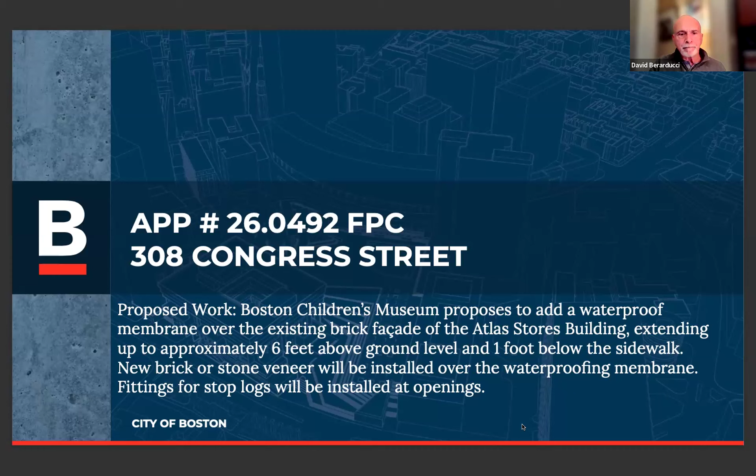Hi everyone, good evening, and thank you for having us come today for this advisory review. What we'll discuss tonight is part of the Boston Children's Museum's holistic plans to tackle resiliency at this sensitive site, so that they can continue operating and welcoming the public to the Fort Point for a long time to come.

To save some time, I'm going to run through a short introduction of who is here tonight. You won't necessarily hear from all of us, but we wanted to make sure you know the full slate of people who are here to answer questions, and apologies in advance if I've missed anyone. From the Children's Museum, we have Jug Chokshi, Chief Financial and Waterfront Advisor; Michelle Rankin, Director of Administration and Operations; and Charlene Merle-Smith, VP of External Relations and Corporate Development. We also have a lot of people from the Sasaki design team, including Mike Frechette, Marta Guerra, Zach Crisco, and James Posh, and I think I got everyone.

And from Arup, we have Kara Slocum, Civil and Resilience Engineer. And with that, I'm going to turn it over to the design team.

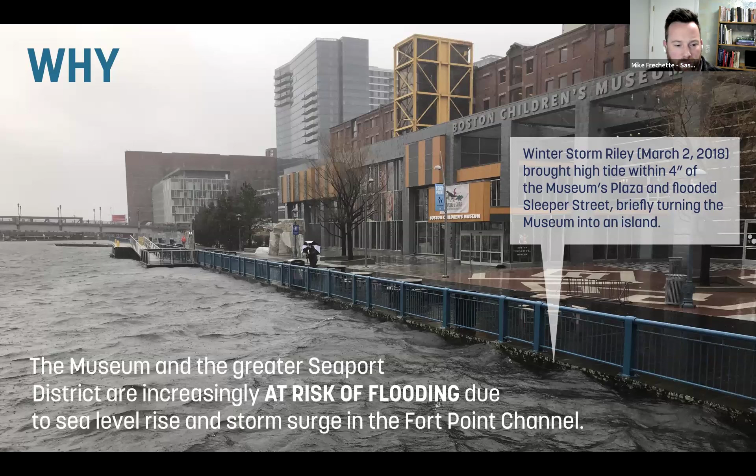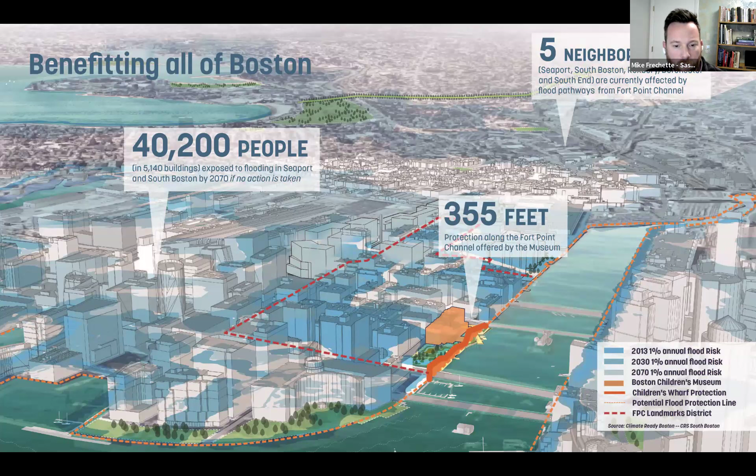Part of the initiatives of the museum have been to be good stewards of their place on the channel and contribute to the protection of the district by providing flood barriers on their property. Most recently, we've been coordinating with the city and their climate team to work with a deployable solution that will effectively bring that orange line across their plaza into reality.

Moving on to what the museum is looking to do in the future. Over the past 6 years, the museum has engaged Sasaki and a broader design team, first for a master plan to really help shape the decades into the future of the museum's operations and understand how they can keep contributing as a member of the community and a critical cultural resource for the city into the future.

Following that, in 2023, the museum took on a building-level resilience study—really looking at pulling in a little bit from the scale of the whole property and the plaza, looking at the building itself, and starting to surface different kinds of solutions for how the building itself could be protected from the threats of sea level rise.

Here, just for context—and I'm sure this audience knows this site quite well—we have the Fort Point Channel in the foreground, the boardwalk, the Children's Museum Plaza and 2006 atrium addition, and then the historic Atlas Stores building in the background of their site, abutting Sleeper Street and reaching all the way out to Congress.

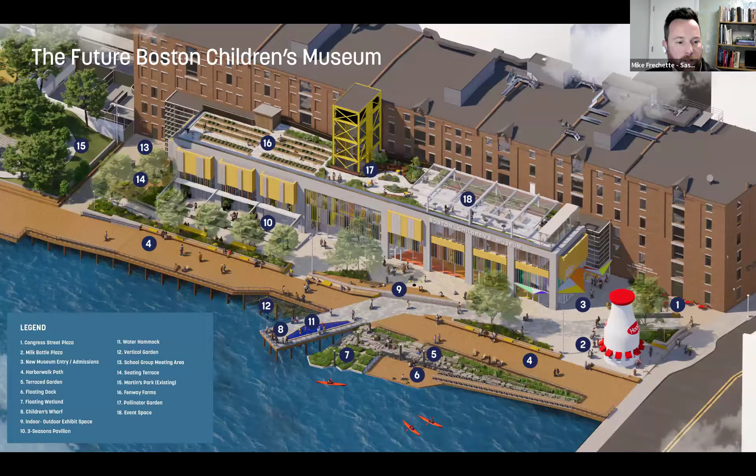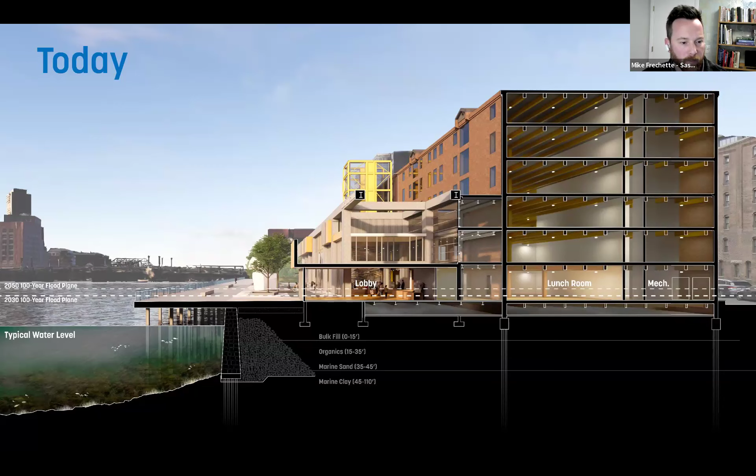What we have overlaid here, in these light dashed lines, are the 2030 100-year floodplain, which is about 2 feet above the current first floor of the museum, and the 2050 100-year floodplain, which is about 4.5 feet above the first floor of the building. Those represent, in each of those years, a 1% chance of a storm event happening that brings water to that elevation.

And so now getting into how we're addressing the specific threats that were reviewed and assessed during the 2023 resiliency study.

We're taking a look at using the MC-FRM design flood elevations. The museum went through a process of evaluating the various risks posed from these different storm datums and what the timeline for those floods really was. And in going through that, we arrived at a 2050 100-year storm as a near enough horizon.

That's something where the pace of projects being implemented at the building level might be completed in time for a level of protection, but before certain district-wide or city-wide initiatives like floodgates or more broad-scale things that would protect multiple properties at once, they might not be ready by 2050. So our approach was, let's design to that timeline and give the city a chance to implement their plans further in the future.

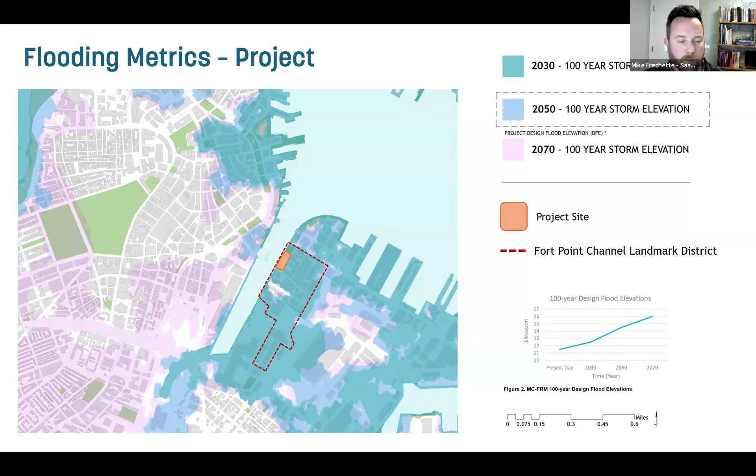On the left, we're looking at these different design flood elevations, looking at 2030, which is approaching quickly, 2050, and 2070, with different associated design flood elevations. Again, looking at 2050 as our intermediate approach that was decided on as the sweet spot, as it were, for setting that level of protection.

In conjunction with this, in the midst of the museum exploring the resiliency measures, Article 25A of the Boston Zoning Code now requires new projects in this area to be flood protected to 4 feet above street level in the area of the city of Fort Point. So this is helping us understand that this is probably a good design flood elevation to use.

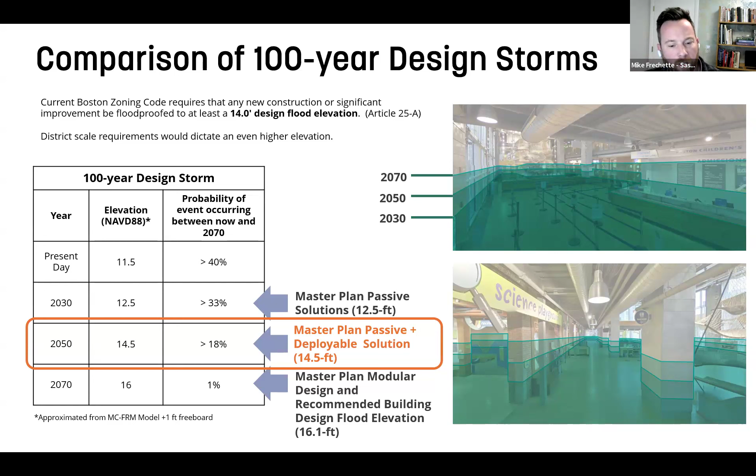Moving into the specific approach of what we're trying to do and how we're trying to achieve that level of protection. The museum engaged Arup engineers to develop solutions and recommendations for how to protect the historic masonry, exterior walls, and structure of the Atlas Stores portion of the museum.

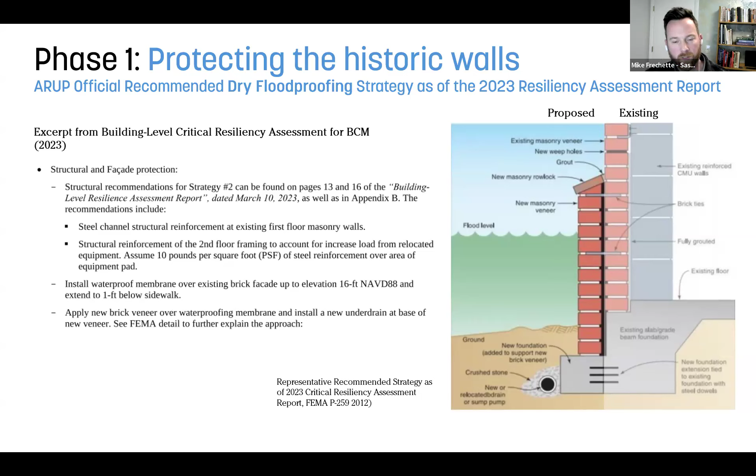This recommendation, after a lot of evaluation of alternatives, became the basis for our approach. Here's that section again. What this does is look at the current initiative of the museum. We're currently in the design phase, design development. And what our current scope of work includes, looks at 4 main strategies.

The first one is taking all of the critical infrastructure inside the building, raising it up above the design flood elevation. The second one, which is the most pertinent to our discussion tonight, is happening at the exterior. So we're protecting the perimeter walls by applying a dry floodproofing solution.

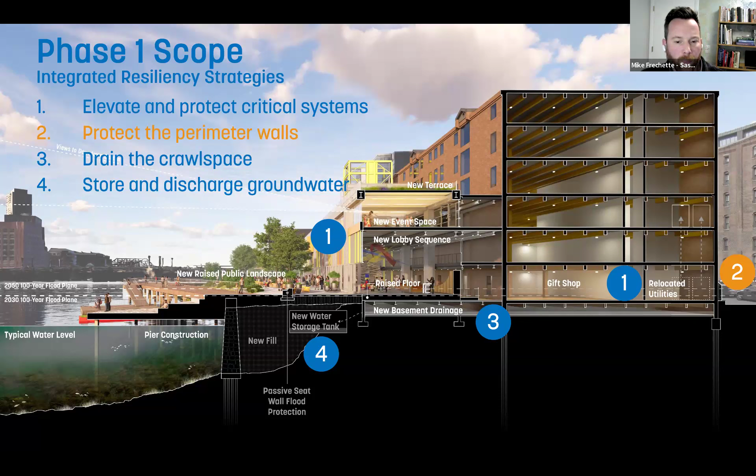And the third is draining the crawl space by way of a foundation drain that extends beneath the entire original Atlas Stores building and the new atrium. And that water is then stored in a below grade cistern and then pumped out to ensure that there's no hydrostatic pressure on the structure of the building during an intense flood event.

This section we'll talk about a little bit about the important considerations of the museum and how this project fits into their operations. Essentially the reason for this entire project is to allow the museum to keep operating with as minimal downtime as possible in the event of a severe storm. Knowing that the museum's mission is to be as available and accessible to the public as possible, trying to keep them open as many days out of the year as they can be, is an important consideration.

At the same time, we're trying to protect the building while showing respect to the museum's context in Fort Point and the Fort Point Channel Landmark District, including a sensitivity to appearance of the building and the materiality, and how that works with the historical context that we're trying to be sensitive to.

An additional thought is really understanding how the solution chosen to protect the building will affect their operations. We'll get into different floodproofing strategies in a few minutes, but we want to understand: do they have a solution that not only protects the building, but does so in a way that allows them to remain operational as much as possible? If a floodproofing solution allowed water into the building, that would result in significantly more downtime than a true dry floodproofing design that kept the entirety of the interior space dry.

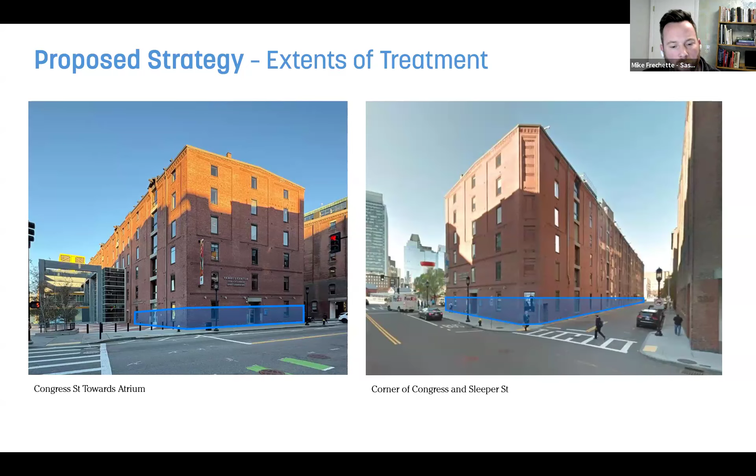These are some street level perspectives showing more context for where that waterproofing is happening. Here we have the 2006 atrium on the left, and you can see the beginning of the exposed surface of the Atlas Stores building, wrapping around the corner at Congress, past the museum's business entrance, around the corner of Sleeper, and down Sleeper all the way. As it turns the corner at the north end of the building, it continues past the loading dock and beyond the equipment yard fence, returning finally to this image on the right, where it meets up again with the atrium.

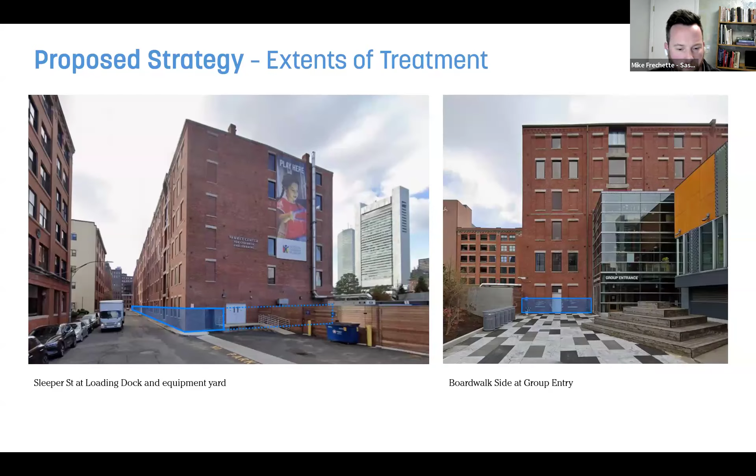The thought was this would be a consistent solution to the building, changing the visible portions of the brick building all in the same, consistent way. As we got into more detail, we did an inventory of the unique characteristics of the Sleeper Street facade, which houses a lot of the museum's HVAC rooms along Sleeper Street. There are a large percentage of windows, especially at the first floor, that have since been closed off but still remain as a presence on the facade.

Looking from the bottom up, there's a plethora of fire department connections. There's quite a bit of miscellaneous infill panels of different materials, currently either painted CMU or composite fiberglass type material. Many of them are infilled with brick, and a fair amount also hold louvers, as part of the HVAC system.

There are two different kinds of stone details on this building: a gray Chelmsford type granite, and brownstone at lintels and sills along this facade. And of course the red brick is the essential characteristic of this building. There's also some miscellaneous metal items like rain leaders and the star tie rod anchors.

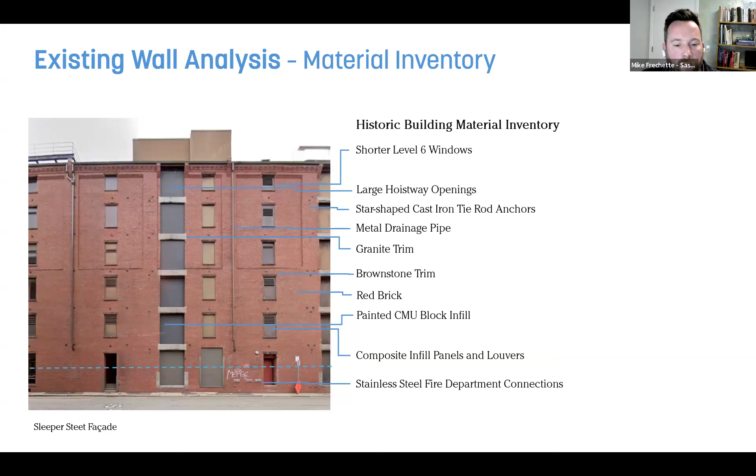Any openings, such as these door recesses, would be fitted with deployable stop logs. The permanent condition would have the jamb receiver of that system, but the infill panels would be deployed when an oncoming storm was understood to be coming.

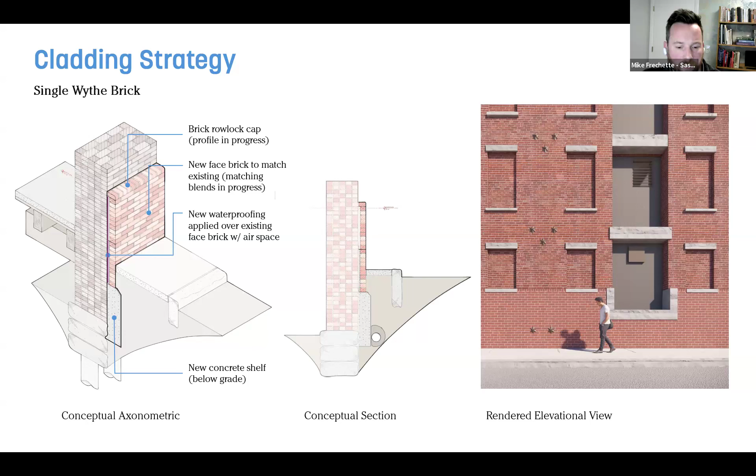The waterproofing solution and the support of that cladding would be the same, and the detail at the top of the brick would be the same as well. It's really just this 12-inch to 18-inch tall base course.

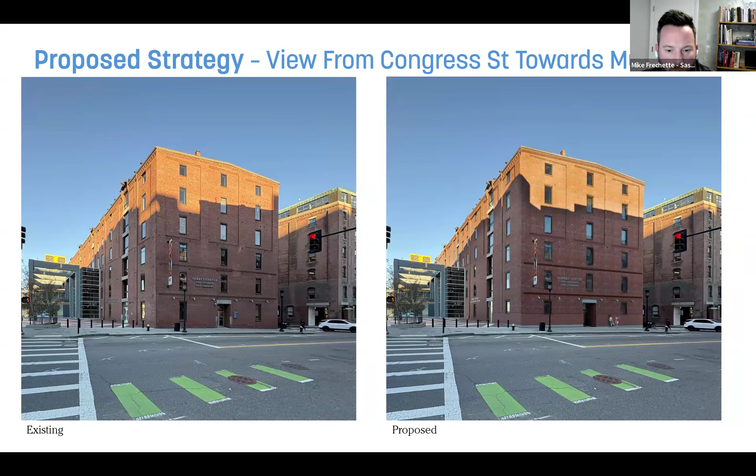Here's another pair of views, looking from opposite the museum across Congress, with the atrium on the left side. This is the existing view and the proposed. We can see a little bit more of the granite base, the brick being added, and the raised sill conditions.

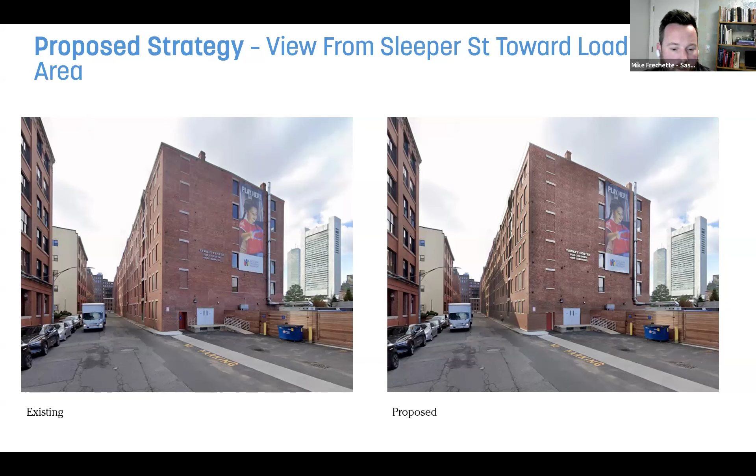And the last pairing of these views—oh, there's one more after this. Here's looking north from the building south to the return of Sleeper Street, where it meets the loading dock of the museum and then extends beyond into the equipment yard area and back to the plaza. So this is from the plaza looking east, showing the return of the brick to meet the atrium.

Now we'll talk a little about the dismissed alternatives and the basis of our selection of a dry floodproofing approach, which is different from the others in that it doesn't allow water into the building whatsoever. Even though the masonry is very thick, five wythes of brick, it's subject to water infiltration given a storm event of long duration. Arup had developed research from a study flood testing various masonry test walls, and based on those results, calculated that given the perimeter of the Atlas Stores building exposed to seawater, almost 200,000 gallons of water would enter the building during an 8-hour flood event. So this led us to consider that a dry floodproofing solution was especially important.

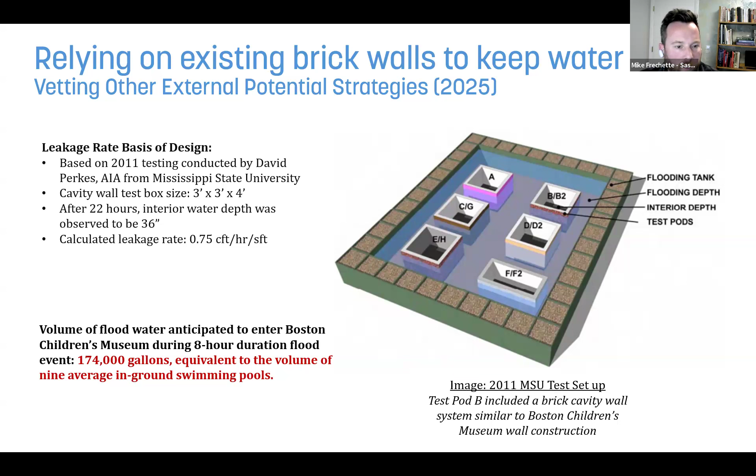Part of our research looked at a really broad range of different solutions for how to address, in our case, sea level rise. Floodproofing looks at coastal strategies and all sorts of different flooding conditions that can be experienced. Ours in particular is due to sea level rise, but the nature of water puts properties at many different types of sites at risk, so there's a broad range of solutions that could be considered.

Some solutions are less suited for a retrofit, like raising the entire building above flood elevation. Others require a lot of space, like flood walls or levees. Others are a little easier to implement, like backflow valves and check valves, making sure below-grade systems don't back up into the building. Some we evaluated and took components of.

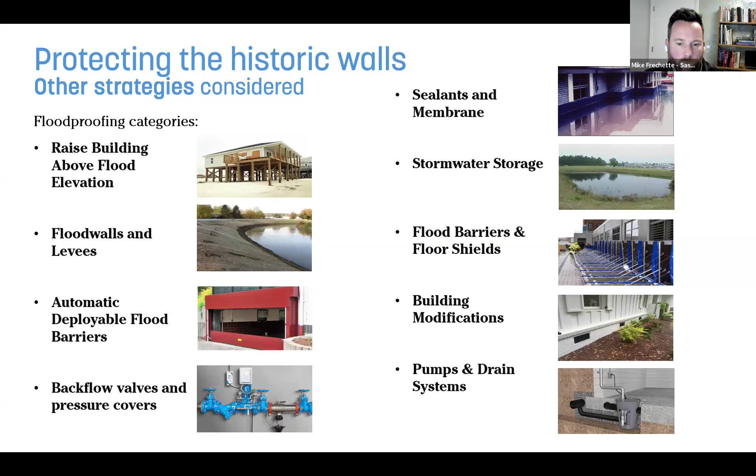The sealants and membranes solution in this image isn't exactly what we're doing, because we're covering it with a cladding, but it is representative of the approach we're using. Deployable barriers we're using at our openings, but thinking of that as a holistic solution for protecting the building would create a condition that requires a lot more space on site than we have, because we have that zero lot line condition.

This shows the three strategies that were effectively part of our short list. We looked at different ways to use dry floodproofing to protect the building and evaluated them for feasibility from technical points of view, effectiveness for the waterproofing the solution is intended to do, and also the aesthetic considerations.

On the left we have strategy 1, which looked at just applying a waterproofing product to the exterior brick and calling it a day. This would have been easy to implement technically, but would have very damaging results to the character of the building, and ultimately would not be as effective because that membrane is not protected. It's subject to wear and tear, and would not be a really effective solution, nor one that participated in the language of the Fort Point Channel neighborhood.

The second one, strategy 2 in the middle, looks at negative side waterproofing, applying waterproofing to the interior face of the brick wall. This was eliminated because it would allow water to permeate the structure of the building. Since this is load-bearing masonry, its integrity is critical, and by the time water reaches the waterproofing line, the building walls would be saturated and the timber structure would be subject to a wetting and drying cycle, known to degrade timber quickly. So this was eliminated, even though it would have had minimal, almost zero impact to the exterior appearance of the building. We were quite certain it would not be an effective solution for the museum.

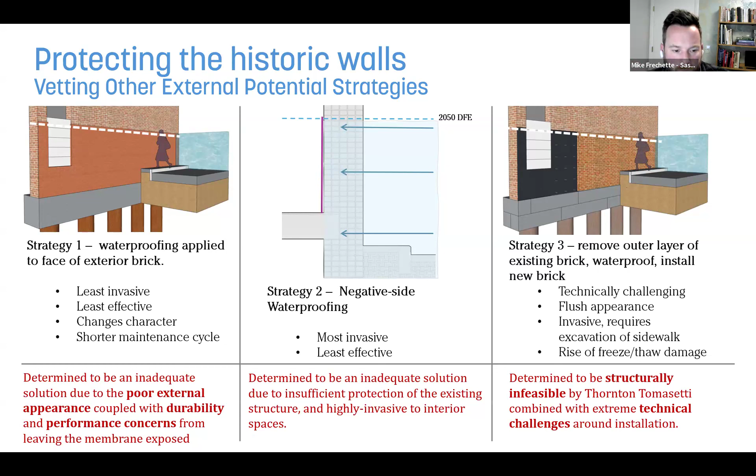The third option looked at cutting away some of the historic brick so waterproofing could be applied further back, perhaps one wythe of brick, then building out with new brick after the waterproofing was applied, so they could have a flush appearance without modifying the building's profile at grade. This was reviewed with our design team, and our structural engineer determined it would be structurally infeasible, since that brick is all load-bearing masonry. Changing the profile and removing structural material from the base was not feasible.

This looks at that first strategy in more detail. This is really about a surface-applied membrane that ends up being exposed to view in its final appearance. So this is something where not only would it not look good, it would be subject to damage given its exposure and not be an effective solution.

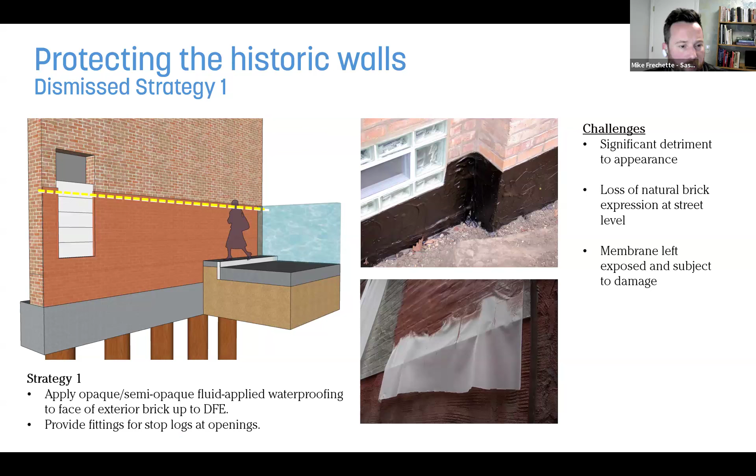This looks at a little more detail at the negative side waterproofing, which is applied to the inside face of brick. In addition to what I was discussing before, where it's looking at saturating the load-bearing masonry, it would also require removing a lot of interior finish space in order to apply it, and be an invasive strategy.

Also, continuity of waterproofing at this plane compared to the outer plane is hard to achieve. We have a considerable amount of significant timber beams that pocket into this wall and create a really difficult perimeter to try to create a continuous waterproofing line with. Where the timber pockets into the brick like this, it's really not possible to keep the timber here and maintain a continuous waterproofing that would keep the timber dry as well.

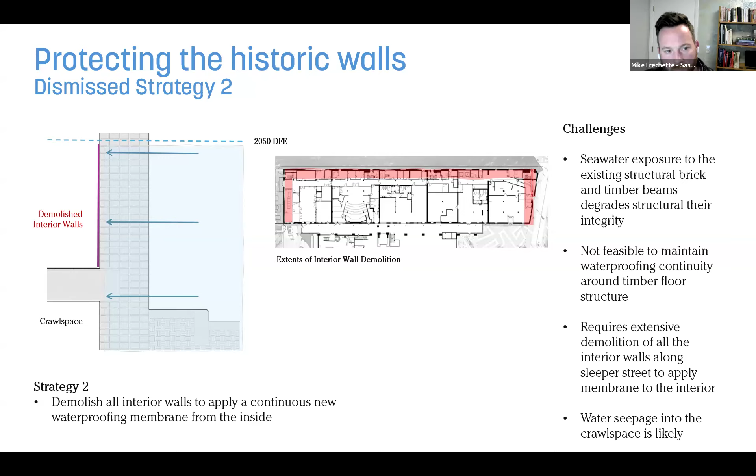And that's our dismissed alternative section.

Lastly, we'll touch on how this project is seeking to align with the schedule of the city of Boston, particularly with the reconstruction of Sleeper Street, which is proposed for spring of 2026. This would involve building out the sidewalk along Sleeper where it meets the Children's Museum to 5 feet, and changing the street to being one way and adding a bike lane, I believe.

What we see in this project is an opportunity to try and align in a way that minimizes impact on the city and not have two possibly consecutive excavations. We're working with the city to try to figure out how we can best work together to make the impacts on the neighborhood as minimal as possible.

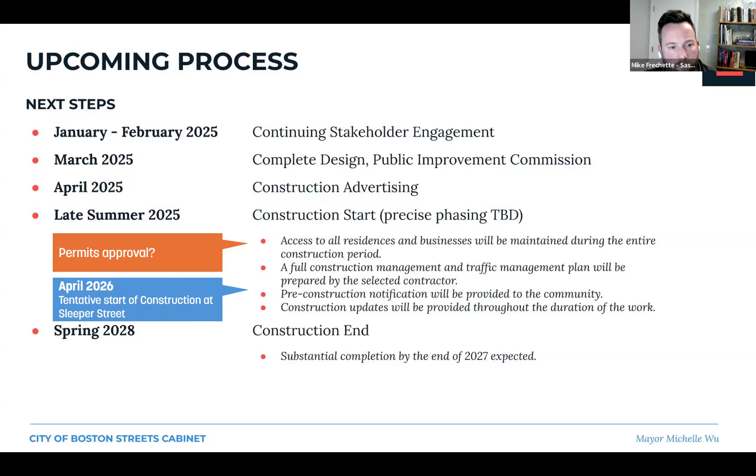And I think that's the end of our deck.

So I can stop my share. Actually, Mike, I think it would be a good idea for you to keep sharing, so if the commissioners have any questions, they can get you through the slides. Oh yeah, sure, of course. Thanks.

Okay, thank you. That was really precise and really showed the problem that you have in terms of the solutions. One of the things I had in mind when you first started presenting was the very thing you presented at the end - I thought, well, why can't you just take a course of brick from the facade, take that away, put the waterproofing, and then insert the new bricks so it would still have a flush condition? I think you said there was an issue with needing some kind of a barrier, a vapor barrier, did I hear you say, or that it wouldn't allow for that?

Right, and so I can jump back to that slide. Okay, and I guess you don't have to go too deep, but just explain what the vapor barrier is, what, an airspace you're creating, or what?

Sure. So starting with this magenta line - that's the waterproofing, and that's an impermeable material. The idea is that if you were to create an airspace, which is what you need in a situation where you have a material like brick masonry that will actually store water when it's subjected to water inundation and flooding, that water is essentially trapped there for a period of time, unless it has an airspace behind it.

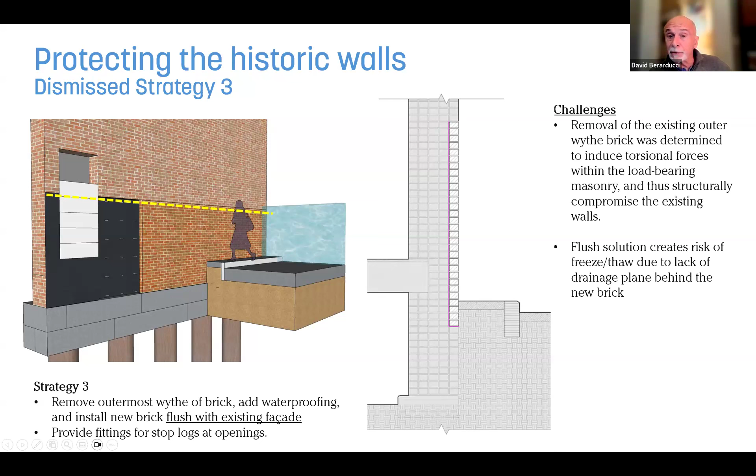What that airspace does is when the brick cladding gets wet, inevitably, it allows a channel of air behind it. So, is the airspace intended just for air to dry the moisture, or for the moisture to wick and drip through by gravity? Actually, it works both ways.

At the top of the cavity there's a vent, and at the bottom there's a weep. So what it does is allow bulk moisture, liquid water, to drain out. There's a through-wall flashing here that would get tucked in before it's visible, but it allows bulk water to drain out, and also air to flow between the top and bottom openings.

That's really important for new construction, certainly. Air spaces are very important because they protect the building. Not only do they allow that drying potential, but they also prevent water from being driven further into the wall through capillary action—if two things are contacting each other, there's a likelihood they'll transmit that moisture through, unless there's a break by means of that airspace.

Okay, so this slide is actually good to keep up, because I had two other questions. One was about the window sills you're moving up to the new height—is that granite going to be flush with the outer wall? I'm guessing it has to be, right, with the additional veneer you're putting on?

Our intention is that it is, at the moment, so we're trying to carry through that relationship. These images might not show it exactly right with the shadow line there, but basically that stone at the moment is at the edges of this perimeter, very close to the face of brick.

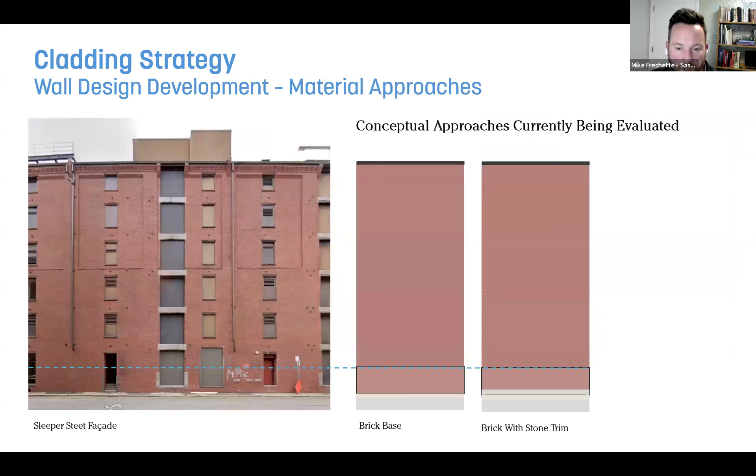So in this image, for example, I think that's an area where we need to give it a little more study. We were certainly focused on the windowsills because that's such a common element, but I think a similar solution for the aprons is needed.

I can speak to where that elevation is and the reasoning as to why. James Poche, project designer here with Sasaki.

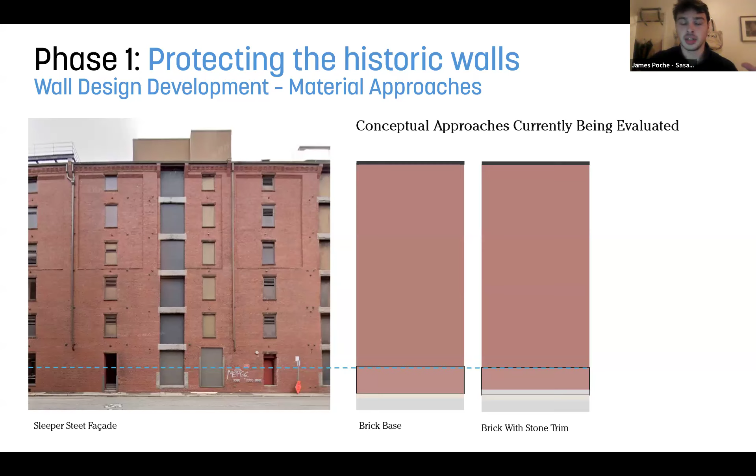So the reason it's set there is that when we raise the sills of the windows—not seen in this image here—we were looking at essentially the relationship of the bottom of that hoistway with the existing windowsill. So we're looking to maintain that relationship, so when you read it along the facade looking down Sleeper Street, we're actually keeping that relationship intact.

Since we need to rebuild that opening, likely a new waterproofed opening to begin with, we can actually make that hoistway opening waterproofed as needed. We actually don't need that since we're rebuilding it anyway. So that was the intention there, to maintain that relationship.

But if that relationship between the bottom sill and the bottom of the hoistway is not something that's felt as important, we certainly don't need to do that.

Well, my whole point in reviewing these kinds of things is, do the least amount of disruption to anything that's of original fabric as you can. So if you can achieve your waterproofing results by not having to move that threshold of the ground level hoistway, at least in my mind, I would say let's keep it where it is.

I don't know that I feel it's important enough that the relationship between the existing sill now and the existing threshold of the hoistway as it is now needs to be maintained, such that if you lift the sill of the window, you also then need to lift the threshold of the hoistway. At least that's my mind's eye. So I would say, depending on what the other commissioners weigh in on, if it's something you can not disrupt, then great.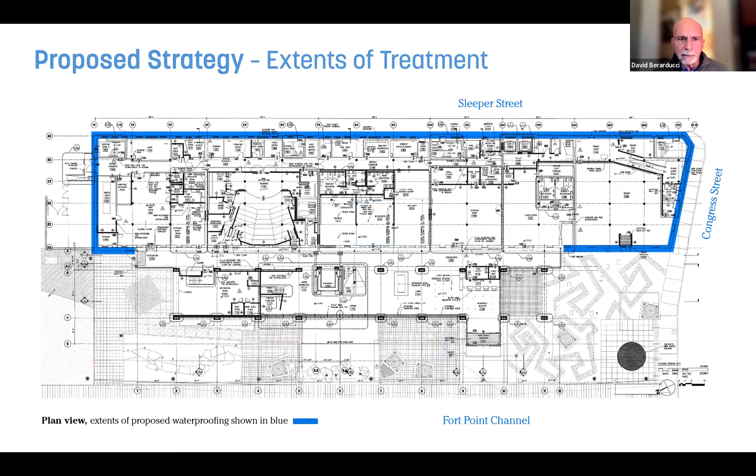Okay, all right. Those are the things that got raised in my mind. So if the other commissioners want to weigh in, please go ahead.

David, that point you made at the end about not necessarily moving the hoistway sills up in order to maintain that proportionality or perspective versus the window openings - at first I was thinking, well, that kind of makes sense, but your final point was, if we don't need to really move them from a flood protection standpoint, leave them as they are. I happen to agree with that. So, change the window sills, but leave the hoistway sills alone.

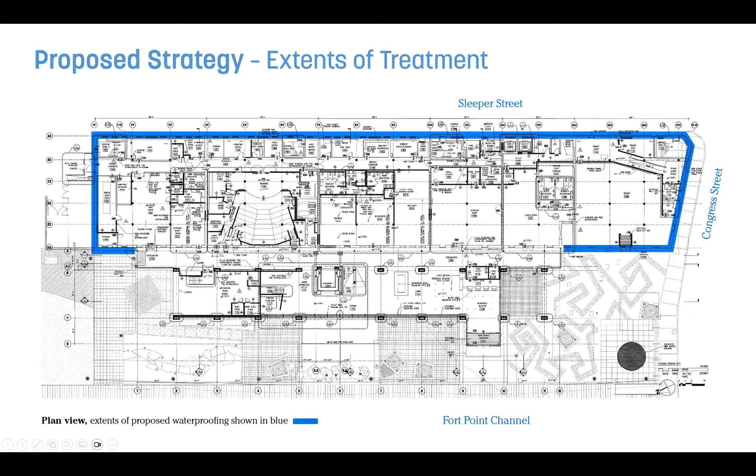That's my first point. Second one, the look of this extra facade that we're sort of overlaying on here - I'm sure there's no way to find brick that looks as weathered and nice and dirty as the existing surface of the building, but it does seem to stand out against the old surface. I don't know if there's some technique for weathering it to make it blend in more. I mean, it's obviously going to be a protective measure and people will recognize it as such, but if it wasn't quite so obtrusive, maybe that would be good.

And the last point is having the sort of preferred approach of having the lower level of granite running along the sidewalk level - what are our dimensions on that again? I think you said something around 12 or 18 inches. Does it need to be that high necessarily, or a couple of the renderings it sort of looked more like maybe 6 or 8 inches, just up to ankle height, which to me would be a little bit more in keeping with it. It wouldn't again be quite as obtrusive. I realize the practical value of this, but maybe just keep that smaller rather than - 18 inches is kind of like a big chunk of granite down at that level.

Yeah, I think - do other commissioners have a thought on that? I agree that a lower granite level could certainly make sense. One thing we're studying is how the topography changes down, especially along that long run of Sleeper Street. Is that 6 inches noticeable? Maybe not enough, but I think a good degree of protection from shoveling and salting could be achieved with less than 18 inches of granite, certainly.

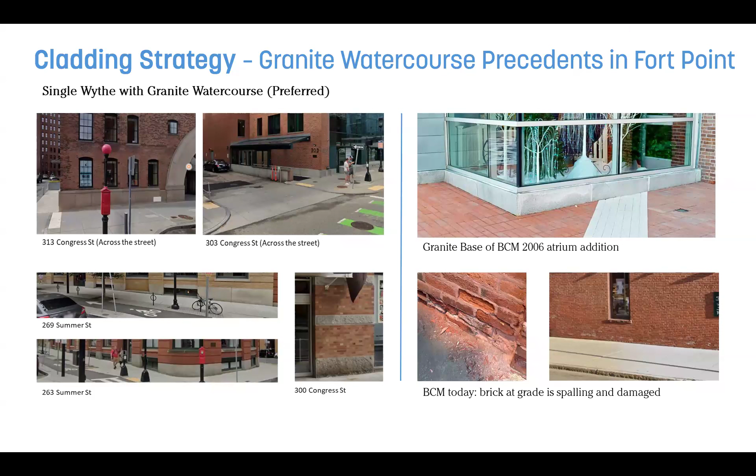There are some examples along Farnsworth where this kind of treatment is present, with subtle shifting in height so it isn't just one big monolithic treatment at ground level. Some of this is cured—we just covered it up. Some of it's cured by David's comment around leaving the existing hoistways at the elevation; that will take the edge off a bit.

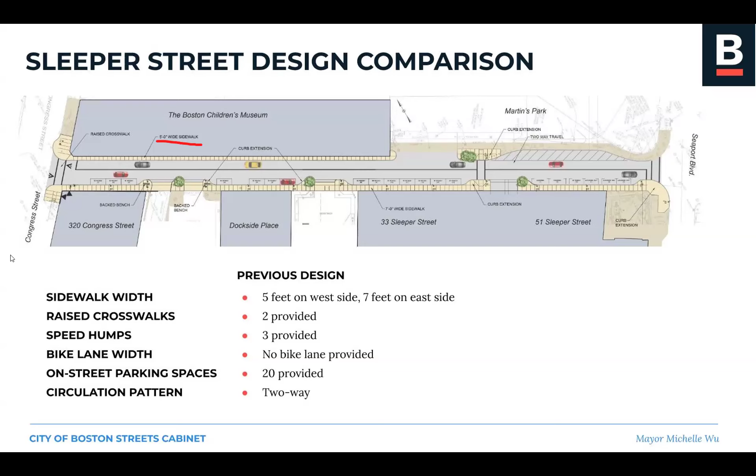Another thing to be sensitive to is that the sidewalk is already so narrow. I'm curious—in the section I saw, it does seem like there's going to be a new sidewalk, or is this not the case? It's really kind of a useless sidewalk currently; maybe it could be 1.5 people wide, or is it possible to get something like 5 feet, which I think is code width. But it definitely constrains the walkability of that street.

Hey guys, I want to jump in quickly—Jeff Alexis, Public Works Engineering, also the PM of the Congress Street, Sleeper Street, A Street design. Sorry, this plan is a little bit outdated; this was prior to us changing the configuration of the roadway to be one-way on Sleeper Street. That sidewalk will be proposed to be 7 feet wide, adjacent to the Children's Museum.

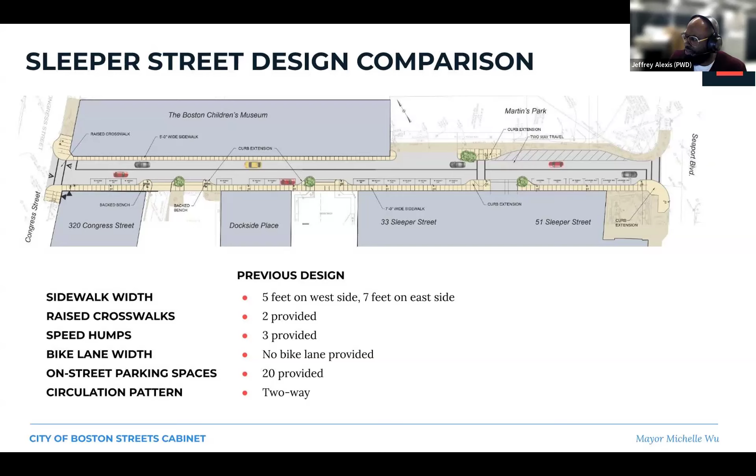Wonderful, yes, great. So with the extension of making the street one way and adding a bike lane, I think you did show the plan on a subsequent sheet in the presentation that showed the correct width—it looked right in the section. So the idea is the sidewalk is moving south, to the other side.

And the idea, Jeff, is that the proponent will remove the sidewalk once, and the new sidewalk will be expanded when they're doing all the subsurface work. It's not as though the sidewalk will be expanded and then this work will be a separate phase—this will all happen as one phase. Is that right? That's what we're trying to do, working with the Boston Children's Museum to do this as one process to limit disruption.

So, this is Chelsea, and I wanted to say that one of the reasons this advisory review is so important tonight is that this design team has been working tirelessly to coordinate with two city projects happening on either side of the building, and we're certainly anxious to help them along the way there.

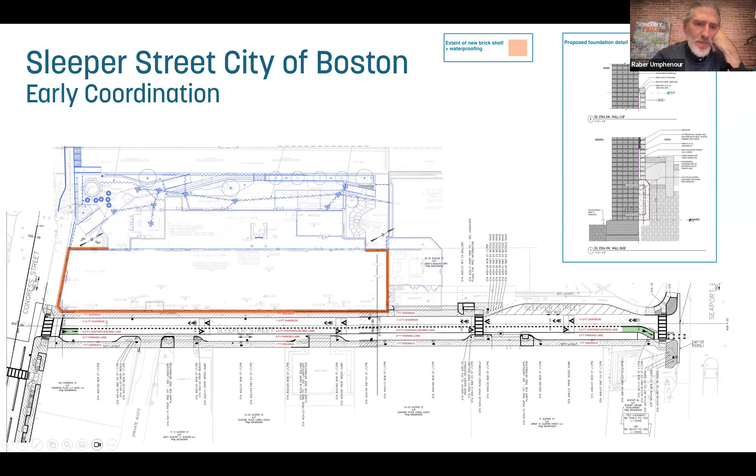Okay, yeah, I just wanted to get back to what Raber and Tom were talking about—this line, instead of having a single line where the brick, the new facade comes out, you wanted that to undulate a little bit. Part of this is solved a bit by your comment, David, of just leaving the hoistways where they are.

In the elevation, we're looking at these facades here, which is something of an angle we won't experience on the street, because when you're going down Sleeper you're looking quite acute to the facade. Something that's kind of nice right now about the existing treatment is that you have these little openings and window ways, with the hoistway at one height and the windows at another height. Most of that variety goes away once all of that becomes bricked over at a pedestrian level.

It's not something I necessarily have an answer for, but it could be as simple as leaving some of those windows below the 5-foot elevation you've established and having floodproofing behind them, just to add a little variety so this doesn't become one big monolithic brick surface. Some of this is also cured a bit by the earlier comment about having more variety to the texture, so it's more in keeping with the multicolored and beautifully varied bricks within the facade.

But I think that's what we're all instinctively trying to prevent, both as a design team and commissioners—this becoming the image of an enormous monolithic wall, right? The design team is going to be... there's going to be a big blank wall, 100 feet of blank wall.

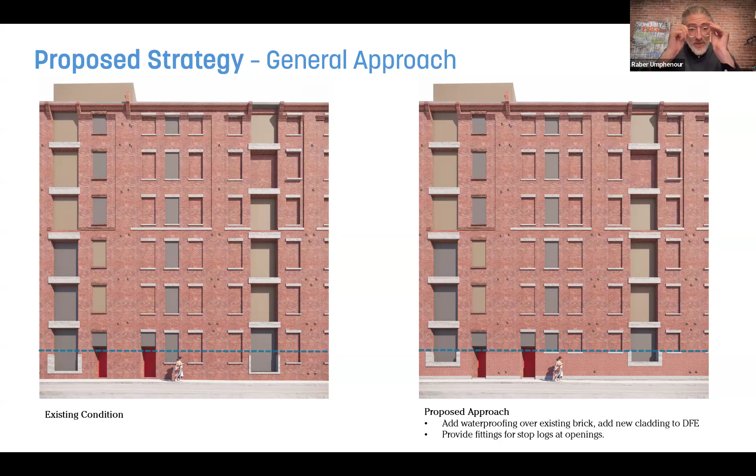Just do everything you can to continue to maintain the really unique characteristics and the unique identity, the character of that while doing what you need to do. The peculiarity of the whole building, peculiarities are okay. It doesn't have to become a homogenous thing. Your peculiarities are the things to celebrate.

I think I understand what you're getting at, and I think you're not going to be able to disguise this fully, and I understand that. But this might start now to tell the new story of the Fort Point Channel District here, where once upon a time windows were able to be where they wanted to be, and we didn't have to deal with water infiltration. Now this is what has to happen, and I think that will start to tell a new story.

All right, so I do want to go through, I know that staff had made some comments, and I know that we're not going to vote on this obviously tonight. It seems like this is going to have to be accepted, we can't possibly say no to it, and we shouldn't. I won't be here for the next hearing, but I think it's worth looking at the staff's comments. There are a series of, as a proviso, certain things they would want to be able to maintain, at least staff maintain, not jurisdiction, but review over as the project progresses. So I would urge the two commissioners to look at those comments and see if that can be incorporated for the full motion when the application comes forward.

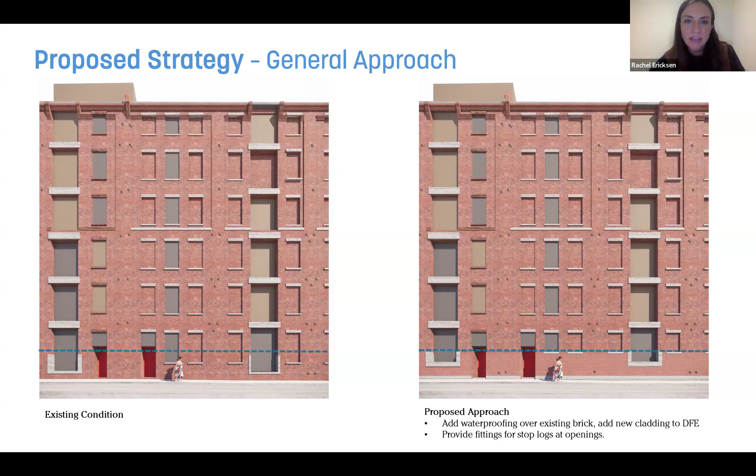Understood. Now, I'm just trying to remember, since this is advisory, we don't take public comment, do we? You have the option to. I have the slide ready if you would like to take public comment, but you don't have to. Well, I guess we could. I think as long as we urge that they be brief. I don't think, and then any final comments can be made at the full application. So sure, we'll do 2 minutes or less. How about a 2 minute warning? Yeah, we'll cut your mic off.

All right. So members of the public will now have an opportunity to ask questions and provide public comment on the application and discussion. To do so, please raise your hand via the Zoom meeting platform. If you're calling in and cannot use the platform, you can press star 9 to raise your hand, or you can send your questions to staff via email at fortpointldc@boston.gov. Honestly, I'm not seeing any raised hands. We did not receive any written public comment in advance of the hearing. All right, so we can then close the public comment period.

And so do you feel you got enough information here tonight, I hope, to go forward with this? Best to the applicant.

We are very thankful to the commissioners for all of your feedback, and we will take it to heart, and we thank you. On behalf of the Children's Museum, we are making it our point to stay here, and this is our way of doing it so that we can keep our history in the Fort Point district. We are very thankful for you, and we encourage everyone to ask questions because this is part of an educational moment for Fort Point and beyond. We want people to be comfortable living with water, and this is the story we're going to be telling from now on. This is how we can live with water, and this is what other buildings can do. So thank you guys so much.